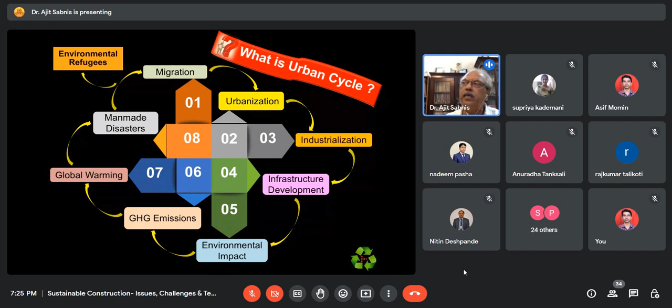Whereas environmental refugees are those people who, out of natural calamities, let us say in a rural area hit by floods, have lost everything. These are the people who just look for a safer place. When they come and settle on the outskirts of tier 2 cities, tier 3 cities, they are not really looking for a better lifestyle, they are just looking for a safer place. These are called environmental refugees. So this urban cycle is inevitable, and it keeps on growing.

Now, what are the major challenges due to climate change in the future? When we say future, this is actually what is already happening. By virtue of this climate change, we are seeing two extremes: either it is too hot or too cold or too windy or too rainy. Peak electricity demand will increase due to warmer and more frequent hot days, and the maximum capacity of current transmission systems will come into the picture. Extreme and unpredictable weather conditions will come into the picture.

Potential water shortages will happen, and this will also lead to uncertainty over our hydroelectric plants working and their efficiency, uncertainty over the water supplies for cooling power plants, etc. And then the danger of natural calamities, including floods. We all know the recent flood in Pakistan, in which so many people were killed, and the earthquake in Turkey, where more than 50,000 people have died.

So these are all due to extreme major changes that are happening, and these are the effects which we are already seeing. They are not future. That's why I would like to say the future is now. It is not the future which we are going to face 50 years later, but the future is now.

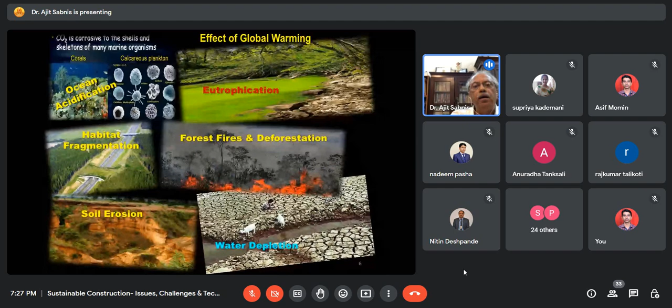These, and then there are several adverse impacts which are taking place. Now, let us come to the real definition of sustainability versus sustainable development. How do we actually define sustainability? Sustainability is that in which the components of ecosystem and their functions are maintained for the present and then future generations. So this is as per the National Building Code 2016, Part 11.

Now, whereas sustainable development as per the World Commission is that which meets the needs of the current generations without compromising the ability of the future generations to meet their own needs. So these are the important definitions, what actually is development, sustainable development and sustainability. So sustainable development calls for strategic approaches as engineers, and it is the individual duty of every individual to participate in saving our planet.

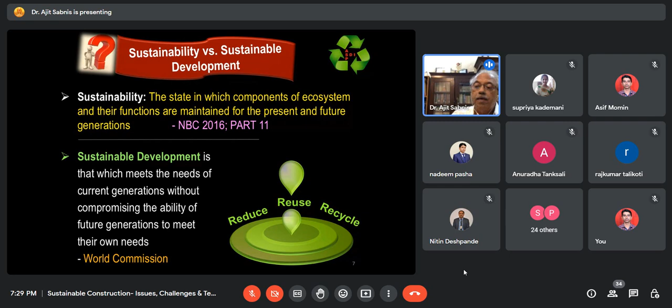Now, what is sustainable construction? As of now, there are several definitions to explain what exactly is sustainable construction. I have just picked up these two important definitions which are more accepted. One definition is sustainable construction is the creation and responsible management of healthy built environment based on resource efficiency and ecological principles. The other definition says a holistic process aiming to restore and maintain harmony between the natural and built environments and create settlements that affirm human dignity and encourage economic activity.

So essentially, both these definitions can be put together, and then we can actually draw the meaning of sustainable construction. Sustainable construction itself is a very vast subject, and before we actually start dwelling into it, sustainable construction cannot be just one of the verticals which we can separate out from the other verticals of a society. Sustainable development has to be firmly founded upon three fundamental pillars: socio-cultural, economic, and environmental. They are not just different verticals, but they are actually completely interconnected.

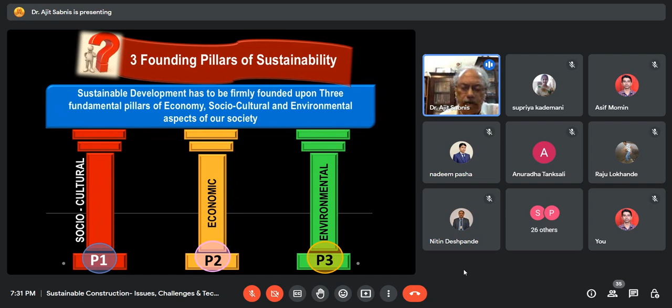So whenever a building is constructed, whenever an infrastructure project is developed, it doesn't just stand there as a separate entity, but it will have its own impact on the surrounding environment. The inhabitants in the surrounding areas, people living there, will get affected. The economic process will get affected. So that is why these founding pillars of sustainability are completely integrated, and there is absolute necessity to take all these things into consideration.

Now, why are we talking more about the construction industry, in particular infrastructure, industrial, and domestic buildings? If you take the total global energy consumption scenario, or nation-wise, let us say in India, if you leave out the agricultural and other areas and just add up domestic, commercial, industrial infrastructure, real estate and mixed use, that almost forms about 73% of the entire Indian energy consumption.

So natural resources are directly proportional. The natural resources we use to produce this kind of energy is amazing, actually. By 2050, they say that we will consume about 3 times. In about 100 years, we will be requiring one more planet Earth to survive. So that is why so much emphasis is being given. Now, let me talk about SDGs, Sustainable Development Goals.

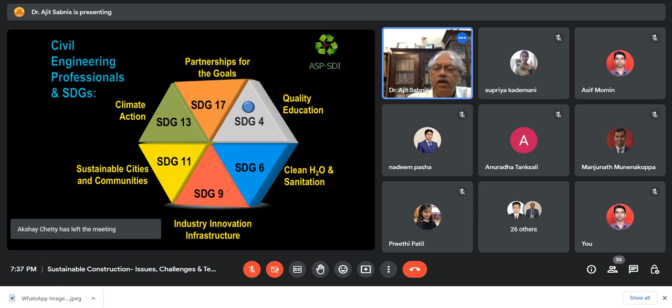Now, in what way are buildings important? Buildings interact with the environment in various ways. Throughout their life cycle, they consume resources in the form of energy, water, materials, etc., and emit several greenhouse gases. We say only carbon dioxide is the greenhouse gas, but actually there are 6 other important greenhouse gases, all converted into carbon dioxide equivalent. That's why we call carbon dioxide one of the important greenhouse gases, but in general we call it carbon footprint. So when we talk about carbon footprint, it is not carbon alone, it implies carbon dioxide.

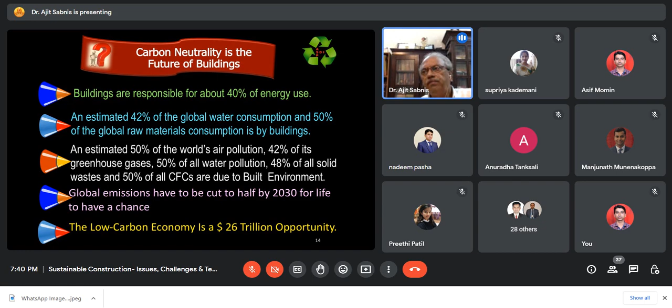Now you will wonder, actually China, USA, and other European countries all put together emit almost 61% of the global greenhouse gas emissions. India's contribution is only 7%, but we need not be happy about that. Our contribution is 7%, but it is getting multiplied because of the population, and very soon we will overtake everybody, unfortunately.

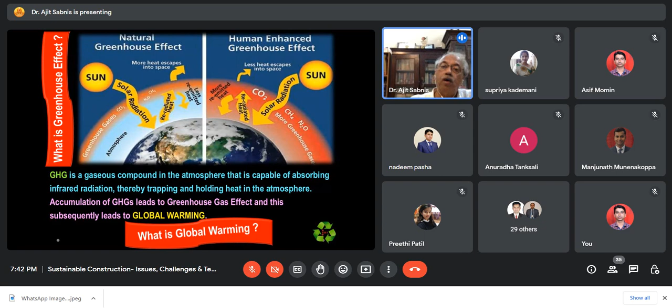This slide is important. On the top, what you see are the important greenhouse gases, about 6 of them: carbon dioxide, methane, nitrous oxide, etc. For example, carbon dioxide and hexafluorides - hexafluoride, if you take a global warming potential of about 100 years, is almost 23,900 times worse than carbon dioxide. But even then, we take carbon dioxide as one of the primary greenhouse gas emissions, because carbon dioxide lives in the atmosphere for almost 140 years.

Now let us say, hypothetically, today or tomorrow all the world stops the carbon emission of greenhouse gases. It will take almost 115 to 140 years to effectively get a carbon dioxide free, greenhouse gas emission free atmosphere. This period is called the lock-in period.

So you don't be happy - that means we need to work continuously for 140 years on greenhouse gas emissions. You can imagine the amount involved. That is the reason why all the other greenhouse gases, other than carbon dioxide, which have a very short-lived life in the atmosphere, are converted to an equivalent of carbon dioxide. That is why the unit of carbon dioxide is in terms of kg CO2 equivalent - in brackets they write 'E' per kg. So everything is converted into an equivalent.

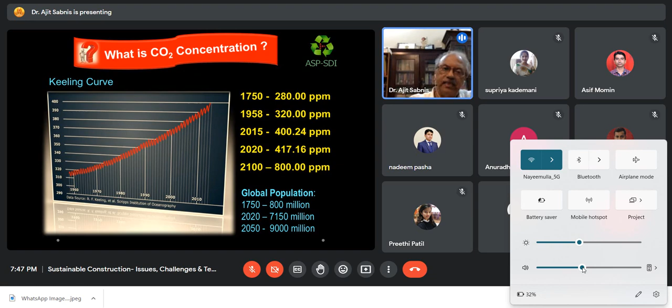If you start, the concentration increases to 550. Some people say the human species will start bleeding through their nose. That's the reason why air pollution also becomes extremely detrimental.

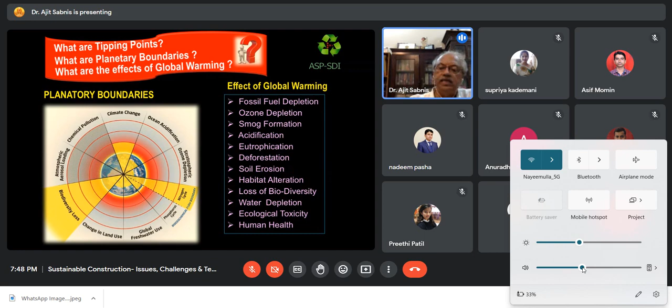Now, urban heat island - I'm sure we all know this. The more we cover, the more hard surfaces we create, reflective roofs, heat from vehicle tops, vehicle surfaces - you name anything, there is some reflection, some absorption. This happens more in cities, particularly in gated communities, and this phenomenon causes island effects.

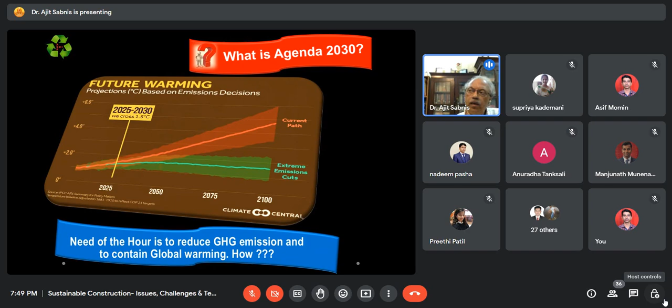Frequently in the sustainability domain, you hear of what is called Agenda 2030. This is nothing but an agenda stating that by 2030, every country should reduce its emission of greenhouse gases, and thereby help reduce the warming of the global temperature to less than 1.5 degrees. That itself is the big agenda.

Now I'd like to come back to the national Indian carbon footprint construction industry scenario. As I said earlier, India's total contribution to global emissions is about 6.5 to 7%. Within this 7%, the construction industry contributes about 40% of the total emission. And within that 40%, 75 to 80% is from operation and maintenance, while the pre-construction and construction phases account for 20 to 25%.

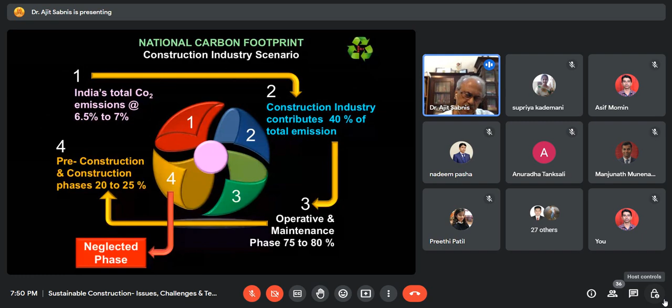This 20 to 25% pre-construction phase is completely neglected by civil engineers. We think sustainability comes into the picture only at the construction phase, but no - it is actually in both the construction and pre-construction phases that it all comes into play. That is why we have several green rating systems and other things that come into the picture. Now, what are the different types of construction?

We have the linear construction method - the conventional construction we are used to: take, make, use, and then dispose. We are not really bothered about wastage - how many times we use the formwork, how many times we use materials, whether we recycle or reuse material. We are really not bothered. Even today, in general, the majority of construction follows this linear method, which is actually a big no.

Then there is circular construction, also called the cradle to cradle principle, where products and assets are designed and built to be more durable, and to be repaired, refurbished, reused, and then dismantled. For example, you construct a building using certain materials with specific specifications and qualities, and after demolition of that building, you should be able to reuse and recycle those materials into a new building.

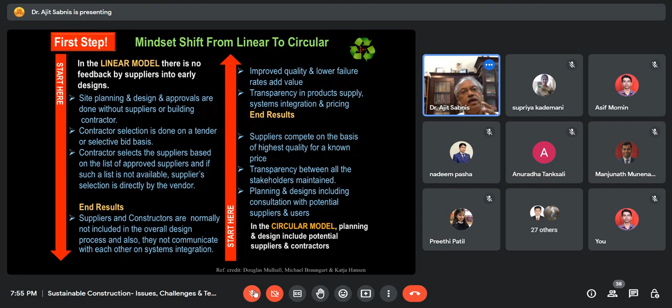So, taking all those inputs, the project takes shape. The design of the project actually takes place. So that means the project design itself becomes more inclusive, more transparent. So as designers, as academicians, we need to shift our mindset from linear construction methodology, even the linear design aspect, to circular design and then circular construction.

Now, there is also a framework to illustrate the application of the circular economy, and it is known as ReSOLVE. It's an acronym, where the first step is regenerate, and the second step is share. The third step is to optimize everything that comes into the picture. Then loop, where remanufacture and the 3Rs come into the picture. Virtualize: dematerializing and going virtual. Then exchange: replacement of old and inefficient materials, applying new technologies, choosing sustainable new products, and all these things actually come into the picture.

So this is one of the new platforms which is under production, and I will not get into the details of this ReSOLVE, but just as information, I would kindly ask you to please remember it, and you can go into the details subsequently.

Now, I told you a little while ago about the carbon spike, and that the pre-construction and construction area is completely neglected. If you take the entire life cycle of a building, the design life will probably be about 50 to 60 years or 60 to 70 years. But for a building constructed well, we don't even think of demolishing it. As long as it lasts, it lasts. But let us take the design life as 60 to 70 years. And in that 60 to 70 years of design life, the construction period is hardly a maximum of 2 or 3 years, not more than that, right?

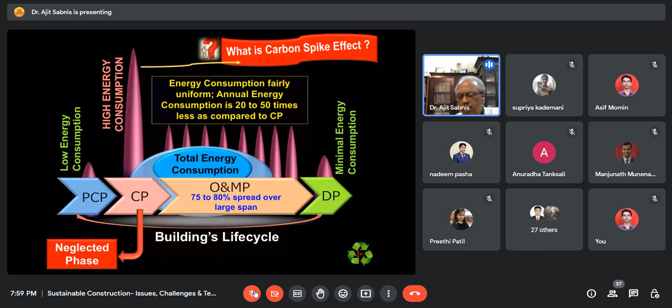Now, what exactly is a comprehensive contemporary ecological design, or as some people call it, comprehensive ecological design? Now, this calls for actually a significant level of knowledge and experience with selecting approach.

Now, for civil engineers, this is going to open up a huge field; this has already opened up. So if there are any students or postgraduates who are listening to this, or faculty members, please remember that this is one field which I have seen with my own eyes across the globe that is going to be one of the extreme. So please consider doing your specialization, post graduation, doctorate in these fields where the demand is going to be extremely huge. Even as a private entrepreneur, these fields are going to be the eye catchers very shortly.

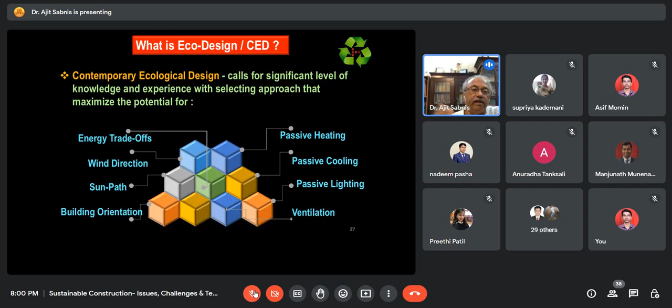So energy trade-offs, wind direction has to be taken into consideration, sun path has to be taken into consideration, the passive architecture, building orientation, passive heating, passive cooling, passive lighting, ventilation, all these things have to be taken into consideration if your building has to be very comprehensively designed.

If you take the elements of sustainable construction design parameters as per NBC 2016, these are actually the 10 elements of sustainable construction. Now, inclusive approach, not in parts. This is what that means. It is not linear construction as we discussed. It has to be a circular construction. The use of technology and advancement has to be incorporated into the entire design so as to minimize or optimize every resource that is available. Manpower resource, the material, all resources have to be minimized.

Buildings as material banks, which we already discussed. Minimum natural resource consumption, that means unnecessary factor of safety need not be there. Thumb rules should be very optimized. We can't now afford that kind of a liberal utilization.

For example, I keep saying there is no point in importing marble from Rajasthan and using it in a South Indian house rather than using granite. Or, for example, in Gulbarga and those areas, not using the locally available Shabad, Kadapa, and all those beautiful slate materials, but bringing all the marble all the way from Rajasthan and then using it. This exactly is the minimum natural resource consumption. You minimize, you utilize the locally available material.

Now, once we have studied these 10 elements in the last slide, let us go into what exactly the construction parameters are, and in the life cycle analysis, which one do we adopt? What exactly is life cycle analysis? We studied it. We take the entire life cycle of a building, starting from whatever materials it requires. I think I will read this here, it will be better.

Life cycle analysis is a method of assessing the sustainability levels of buildings or infrastructure projects from pre-construction phase to demolition phase, satisfying the circular construction principles or the cradle to grave, cradle to cradle principles.

Then now we have three methods of life cycle analysis. One is the process analysis, which actually involves the data related to each of the processes, starting from raw materials extraction, and non-availability of reliable data. Now here, the full data for the entire thing is not available to us. It's extremely difficult. Who will keep the idea how much raw material was used for preparing the tile that is used in my house? That data will not be available. It's an extremely complicated process.

Then the second one is input-output analysis. This particular methodology captures and derives data from several resources, including the data from the economic sectors. Hence, this also becomes extremely complicated because the data will keep on changing; it is extremely dynamic. The economic conditions are so. This also has its own limitations.

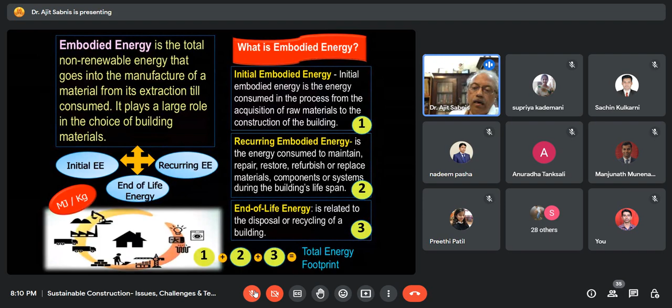So in combination, initial embodied energy, recurring embodied energy, and end of life energy is the total energy input footprint of the life cycle of a building. So embodied energy is not just one simple value. As engineers, we have to take all three classifications, three types of energy, into consideration.

Now, what is embodied carbon? Embodied carbon is the carbon footprint of a material. It considers how many greenhouse gases are released throughout the supply chain. The way energy consumption is calculated in embodied energy, similarly, how much carbon dioxide is emitted in each process gives an idea of embodied carbon. Embodied carbon, as I told you, is expressed in kg carbon dioxide per kg, and embodied energy is expressed in megajoules per kg, per cubic meter or per unit; everything can ultimately be converted.

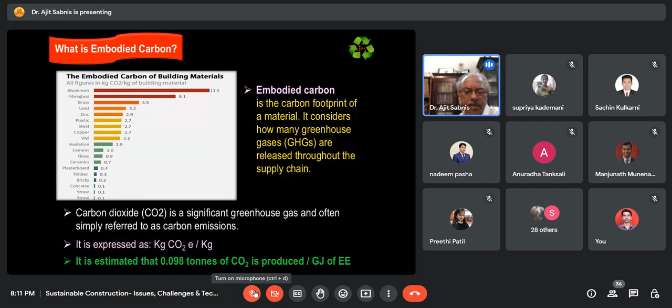Now, once we understand embodied energy and embodied carbon, there is a beautiful concept. We can use only this embodied energy and embodied carbon to understand the status of a building.

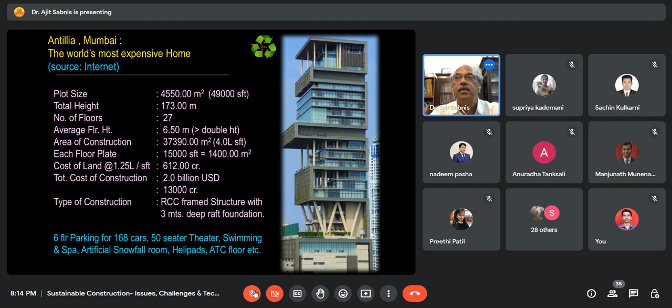Please believe it. The total cost of the project is 13,000 crores, which amounts to about 3 lakh per square feet. The house has got 6 car parking floors for 168 cars, a 50-seater theater, swimming pool, spa, artificial snowfall room, helipad, an air traffic control floor, etc. Now, how does it calculate from the embodied energy and embodied carbon content? The cost of construction is approximately 2.86 lakh, or 3 lakh, per square feet.

Now, what is the total embodied energy of the entire building? I will tell you how to calculate embodied energy in just a few slides, but as I said, we need megajoules per kg or per unit. This house is expressed in gigajoules, that is megajoules multiplied by 10 to the power of 3. So 3,36,510 gigajoules is the energy consumed for the entire building. When you convert that into electricity at 10 rupees per unit, the energy consumed by this building is approximately 92 crores. That is, 100 crores is the embodied energy in terms of commercial value of this building.

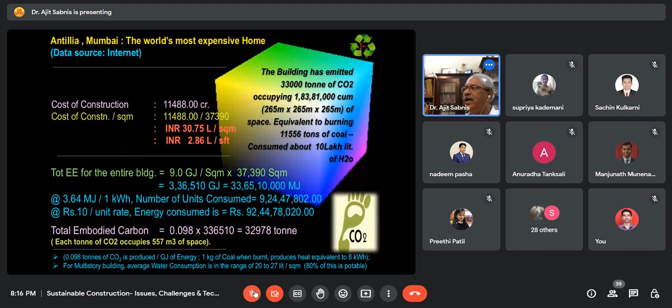Now, just 1 second. This is how we calculate; as an example, you can take any building and calculate using the embodied energy and embodied carbon. Then what are the other ways to calculate embodied energy and compare whether my building is sustainable or not? We need to understand that there are buildings in India, for us to compare, which are extremely sustainable. They are multi-storied, framed structures, but in spite of that, they are extremely sustainable.

Benchmarking is one of the important aspects specified by the UNDP, the United Nations Development Program, and also UNEP, the United Nations Environment Program. Benchmarking of buildings provides a set of measurable baseline values which facilitate improvements in the overall energy performance of a particular building.

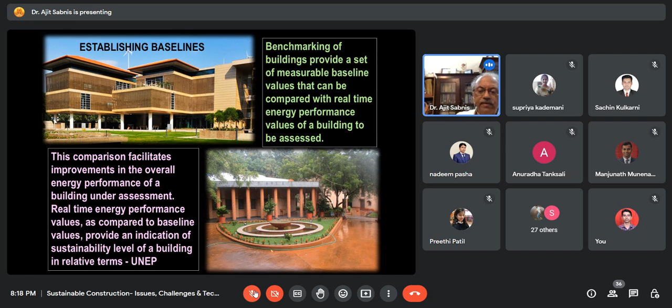See, in this figure, we see two figures. They're simple buildings, but actually extremely elegant. The bottom one, you see an extremely elegant standalone conference hall. And this is one of the buildings what we see. So we need to understand the baseline buildings also.

And there are what are known as the green building ratings that also come into the picture. And please remember that all these green building ratings are criteria-based ratings. That means if we do rainwater harvesting in a project, we get so many marks. We use sustainable materials, we get so many marks. So these are all criteria based.

No doubt, by following green rating systems, it could be anything. It could be IGBC, it could be USGBC or anything. There are several green building rating systems. In the world, approximately there are about 64 green rating systems. And in India, we have several rating systems being used.

HK BEAM, which is from Hong Kong. UK BREEAM is also being used. Singapore Green Mark is being used in India for green buildings. But IGBC, GRIHA rating from TERI, IGBC and USGBC, these are very well accepted green rating systems.

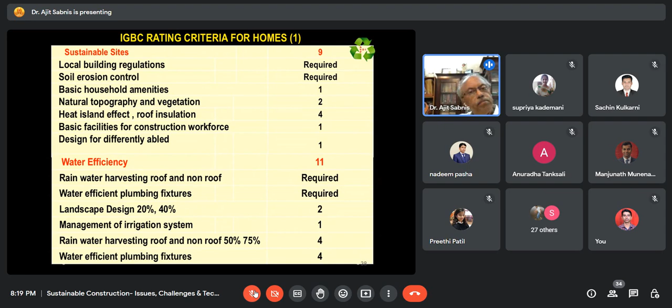Now, these are just the criteria. If you go through the green building rating systems, these I have just taken to give you an idea. In terms of the Indian Green Building Council, how do they actually rate a building? These are the different criteria, which you can get on the net if you just search IGBC rating criteria. So I will not go through these in detail due to paucity of time.

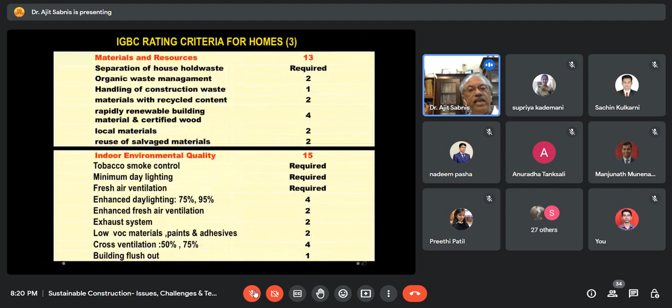Now, so when you get these LEED rating systems, let us say your benchmark project. Just a few minutes back, I talked about establishing a benchmark project. So now that benchmark project has to be validated by the several green building certifications. So the example I'm going to discuss with you in a few more slides has been validated with reference to the LEED certification and also IGBC certification. So BMP is a benchmark project, DMP is a demonstrative project. So this benchmark validation is also actually done.

Similarly, we can take green low energy buildings, etc. Somebody was asking me how much it should be, is there any criteria for how much it should be, etc. See, there is no fixed criteria, but there are classifications which I'm going to now discuss. Actually, the next 30 minutes is going to be extremely technical and extremely fast. So we will understand all the things.

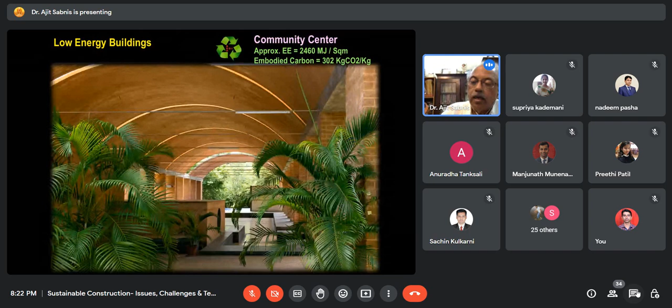These are a few. For example, for this particular building, the embodied energy is only 2,460. As compared to this particular configuration of a building, suppose you construct the same building using an RCC structure, it goes to 5,000 to 7,000 megajoules per square meter. And embodied carbon also goes to 500 to 600 kg CO2 per kg. So there is no specific range which has evolved, but there is a classification available to us. These are a few examples of low energy buildings.

Now, I will quickly rush through 12 important steps required for sustainable construction. How can we design sustainable construction? Step number 1, we need to preliminarily peg the details of the performance targets. That means what should be my energy consumption, what should be my water consumption, what type of material I should use, what will be the economic performance, what are the different construction practices, what do I do with the waste, how do I optimize the waste, and how do I give the best indoor environment quality, landscape. All these things will have to come into the picture, and the targets, and then the pre-construction phase design has to be done.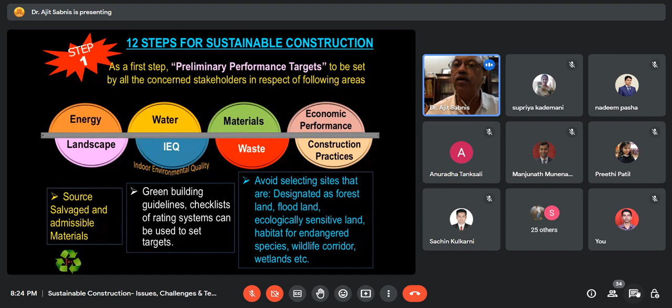This is where the circular principle comes into the picture, because all these things require vendors' inputs also. Just the owner or the architect or the primary designer will not be in a position to give inputs for all these things. That's why the circularity principle calls for extremely transparent involvement of all the engineers and all the stakeholders.

The second step is to protect or enhance the site's ecological integrity and biodiversity. Basically, you try to minimize the development footprint. Suppose we don't construct from compound wall to compound wall and claim we've achieved maximum coverage, or deviate using dirty schemes like akrama sakrama. Reduce the footprint.

I happened to be with Abdul Kalam ji, and had the opportunity to spend about 4 hours one-to-one with him. I asked him how he would define sustainability in his own terms. He gave me a fantastic definition: sustainability is a thin line drawn between need and greed. That answers the whole thing. Out of greed, if my requirement is a 1000 square foot building, I construct a 4000 square foot building. So this is the line to be drawn between need and greed.

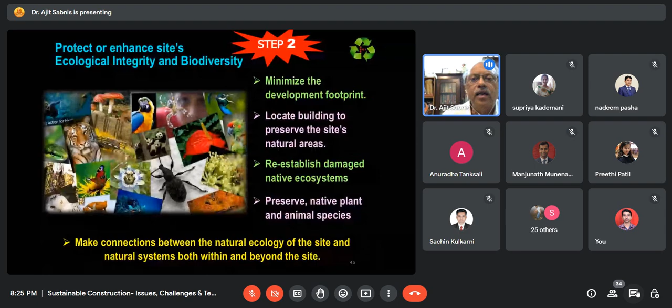This also applies to various other site conditions. The third step is to reduce or eliminate disturbance to the water system. This isn't just about small 30x40 or 40x60 sites — we're talking about huge infrastructure projects where land acquisition takes place. For example, we see what happens in Bangalore, where lakes get occupied. This is an important criterion: we should not disturb the existing water system, as nature has almost found its own way for stormwater runoff and other things.

Minimal disturbance has to be caused. Not only this, we need to address the entire water system — separators for oil and water separation should be done, and roads and parking areas should be designed without curbs, so that stormwater runoff from roads can be collected on site. In a nutshell, we need to reduce or eliminate disturbance to the water system.

Step number 4: prevent or reduce potable water use for irrigation. We need to start using recycled water, reused water, and water-efficient plants to the maximum extent possible. It's not just about water utilization itself — rainwater harvesting comes into the picture, along with water-efficient plants. This is where science, innovation and technology come in, where native species can be used. Use water-efficient irrigation systems, micro irrigation, moisture sensors, etc. All these things have to be brought into the picture.

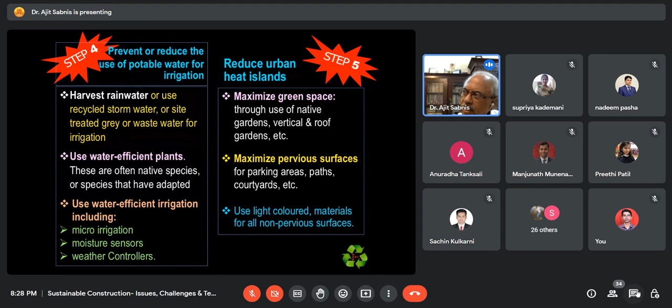Step number 5: reduce urban heat islands. Maximize green spaces, and don't cover unnecessary area around the building — keep it as open as possible, with maximum pervious surfaces. Use materials that are pervious — for example, new generation pervious concrete and blocks. We can use several materials that let hard surfaces percolate, increasing the surface area of water-absorbing, pervious surfaces, so the heat island effect can be reduced.

Step number 6: use existing and proposed trees. For plantings, if there are grown-up trees, try to replant and transplant them. Orient the buildings to optimize — this is where we're talking about passive architecture. Orient the building to wind, taking the sun path and wind path into consideration, and use the existing topography as well.

Step number 7: design for flexibility. There's a cardinal principle in architecture — form follows function, function follows form. We need to design structures to be more resilient and flexible, allowing for changes in use forever. I may design a building today as a theater, or build a structure as a Kalyana Mandapam or marriage hall. In Bangalore, we've seen many such buildings converted into theaters, or theaters converted into marriage halls. Instead of demolishing and rebuilding, the design should take flexibility into consideration.

Also, design for disassembly, which I already talked about — we need to select materials that can be disassembled and then reused frequently.

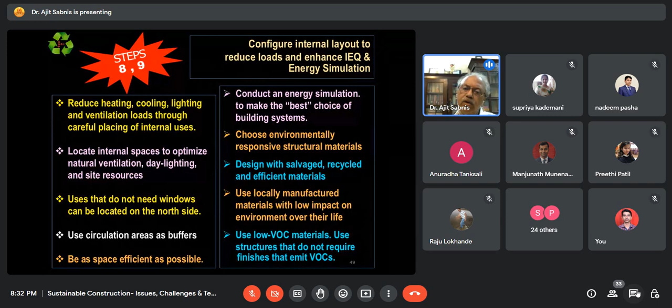And good thing is that a lot of awareness is happening, and many of the clients are coming out with these requirements. More and more green awareness is happening, and we need to use, as far as paint is concerned, low VOC materials, use structures that do not require finishes that emit VOCs, etc.

Then step number 10, design the envelope. That's exactly what I talked about, designing the envelope to bring the daylight and views. So designing the envelope means the entire outside wall, outside portion of the building, the barrier between the external environment and the internal environment, is the envelope. As the definition goes.

Now, for example, this particular building you are seeing now is just a sample building done under the guidance of the United Nations, following the United Nations circularity principle. It's a two-storied building, ground and first floor, with vault construction on the roof. It doesn't have a flat roof, no air conditioning, no fans inside, but there is a difference of about 10 degrees temperature inside and outside the building.

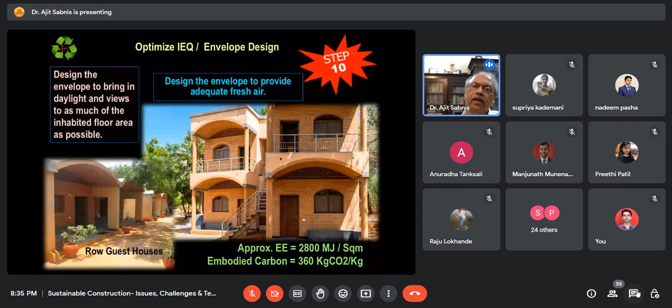Now, the designing of the envelope to bring the daylight and views to as much of the inhabited floor area as possible. So designing of the envelope becomes extremely important also.

Now, building envelope is the one which I talked about, which includes the solar aspect, the roof, the foundation, the walls, everything, and the interaction of the external environment into the internal environment should be studied. What exactly is the difference? What are the barriers? What is the function of the barrier? Is it only to avoid heat transmission, or is the external environment extremely moist, and is it to trap the moisture? These are the important considerations.

So we need to design the walls, the roof, the fenestration - that is the openings, the doors and windows, the joineries, the floor, the surface finishes. All these things have to be taken into consideration when we talk about the building.

Now step number 10, we already talked about good indoor air quality. Air quality encompasses factors such as maintenance of acceptable temperature, good indoor air quality, plus the indoor environmental quality also have to be taken into consideration. That is acceptable temperature, relative humidity, control of airborne contaminants, and because of that it's advisable to use low VOC materials, and adequate ventilation, etc. All these things come into the picture.

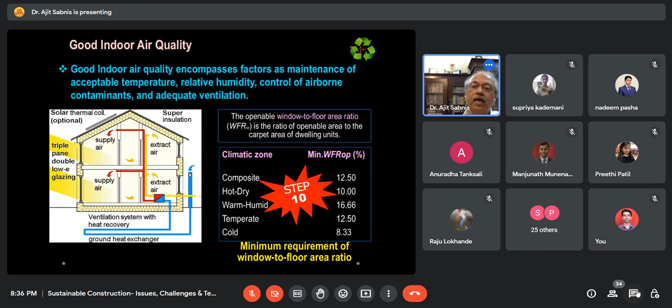Now step number 11 is the accumulation, as I said - first reduce the ozone depletion. That means reduce the usage of air conditioners and optimize the entire HVAC system itself.

Eventually, then installing alternative wastewater technologies. How can we reuse the water? What kind of treatment plants can be used? How can rainwater be used? All these things can be done - rainwater harvesting, how can we replenish the water?

All major building system designs should be documented for commissioning, taking these things into consideration. So that is why in the circularity principle, more than the construction phase, all these things which happen in the pre-construction phase and the construction phase become the most important thing to view.

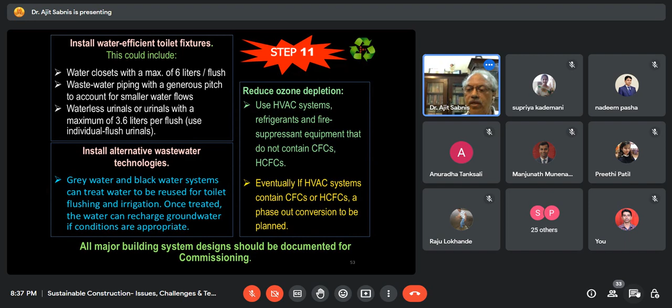Now step number 12 - what exactly are the alternative building materials? Which material should I use? This is the question which always comes into the picture. I will not go into detail on materials - there are several materials, but most of us know what the materials are.

Just to give an example, between concrete hollow block and concrete solid block, which is better? Which concrete block in terms of embodied energy and embodied carbon? That should be compared with tables. There are a lot of tables available which give you the values of embodied energy, embodied carbon, etc. So from those two perspectives, choose those materials.

And then low embodied energy materials should be chosen and maximized. So for example, instead of concrete blocks or hollow blocks or even clay bricks - bricks, if heated, become much less sustainable. Bricks are not sustainable.

Only soil compressed blocks which are not heated by burning coal are sustainable, manufactured at site. They are sustainable, not the bricks.

The other part is, suppose you use fly ash bricks - they're definitely more sustainable. So instead of fly ash bricks, if you want to use something in between, then aerated concrete blocks come into the picture, which meet all the compressive strength criteria, the durability criteria, and the volume requirements.

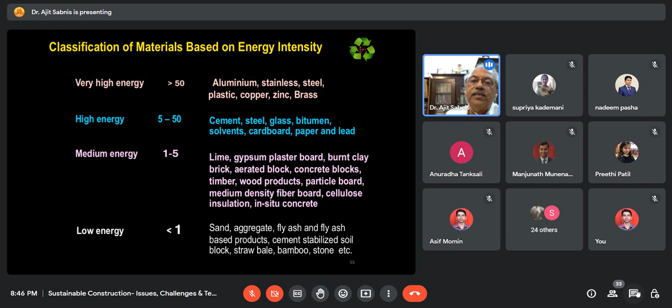Now, I have another 30 minutes, so we will come to very interesting case studies. I told you that there are a lot of tables where we get these values. This is out of academic interest.

What you are seeing on the screen is an embodied energy and embodied carbon table called Inventory of Carbon and Energy, published by Bath University, a joint venture with the Institution of Civil Engineers, UK. Every year they take the entire global scenario into consideration, and average values of different materials are used. For example, I have taken aggregate: it has embodied energy of 0.1 megajoules per kg and embodied carbon of 0.005.

Whereas for aluminium, they give you complete details for different types. If new aluminium extrusion is used for windows, it comes to 218. Kindly focus on my cursor if it is visible to you. Under embodied energy, for virgin aluminium it is 218, the highest embodied energy among the materials.

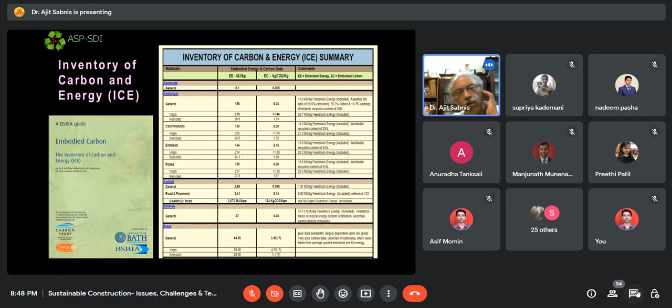You can actually download this. This is a free download available. You just type download PDF inventory of carbon and energy. You will get these values. This is extremely beautiful. So these are the tables. And not only that, for every material, they give actually material profile. They give different data, different characters, and what exactly is its impact. Everything, and what is the standard deviation also they give you.

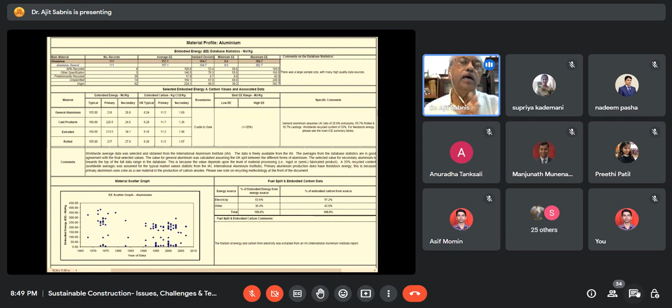So, for example, cradle to gate boundaries, if you want to analyze the building from cradle to cradle, or what we spoke about circularity principle, the standard deviation is about plus or minus 20%. So all these details, it's very difficult to explain; this one particular page itself we can talk about for hours together. So kindly go through these, download that document, and you will be able to see all these details. It's not a very big document, 50 to 60 pages.

Now, as academicians, you would be interested, how do we calculate embodied energy? So I have taken M200 concrete. How do we calculate? We all are used to rate analysis. We know the density of materials, we know all the physical and mechanical properties of the materials. So based on that we can calculate. Now let us take M200 concrete per cubic meter. Approximately I have considered 400 kg of cement is required per cubic meter of M200.

Now, as per the inventories we saw, from the table, you see that for OPC it is about 4.5 megajoules per kg of cement. So for 400 kgs, you get 1800 megajoules per cubic meter. And similarly, for coarse aggregate, you get 166.5 megajoules. And then for fine aggregates, you get 129. Transportation is also involved in the cement, so they add for the cement transportation. This also is a figure given in the inventory table. That is why I have added this.

If you add that with properly calculated units, the unit of transportation is 0.00285 megajoules per kg per kilometer. So you need to be very careful in calculating the units. Then you add about 10% for miscellaneous activities. So the total embodied energy per cubic meter of M200 concrete is 2493.70 megajoules. If you divide it by the density of the concrete, I have taken 2400 kgs per cubic meter here. So if you divide the total of 2493 megajoules by 2400, you get 1.06 megajoules per kg.

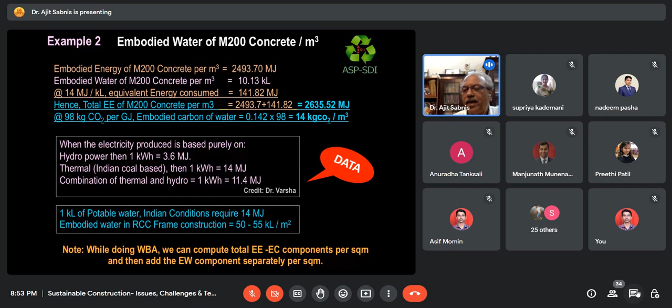Now, similarly, we can calculate on the basis of embodied water. I will just rush through this. We just took the example of materials, how we calculate for the material. Now, a building doesn't consider only the materials. Let us say, how do we calculate for the formwork? Let us take a shuttering formwork of about 5 meters by 5 meters. You have different formwork plates of different sizes, 900 by 600 mm.

All of us are used to this conventional formwork system. Now, there are conventional formwork systems which use MS floor plates, jacks, adjustable jacks, then steel props, etc. And then there is also a formwork system which completely uses plywood. You know, the entire floor is also done with ply, and all those things.

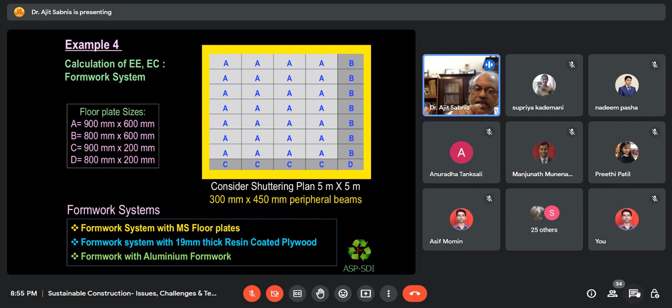Then there is an aluminium formwork system, which we call a monolithic formwork system, which we see in the majority of multi-storied buildings or mass housing, etc. These are the three systems which we consider. And if we analyze these three systems from embodied energy calculations and embodied carbon calculations, we can actually calculate all these. I will just show you this example.

Now, for example, by embodied energy calculation, if you take the conventional formwork system, what does it include? It includes MS floor plates, MS spans, jacks and props, silver oak for the supporting. We don't use it for everything. So this is the combination of the conventional formwork system when we use it. So we need to calculate how many numbers of them, what will be the total quantity, the unit weight, the total weight in kgs, and from the tables, from the inventories, what will be their megajoules embodied energy per kg and the total embodied energy.

So for the conventional formwork system of 5 by 5 meters, the total embodied energy is coming to 80,334 megajoules per total 25 square meters. So per square meter, if you actually calculate, it comes to about 3,213 megajoules per square meter. Similarly, embodied carbon values are also put in, and they can also be calculated. Thus, we can actually calculate the embodied energy for the conventional building, and then decide.

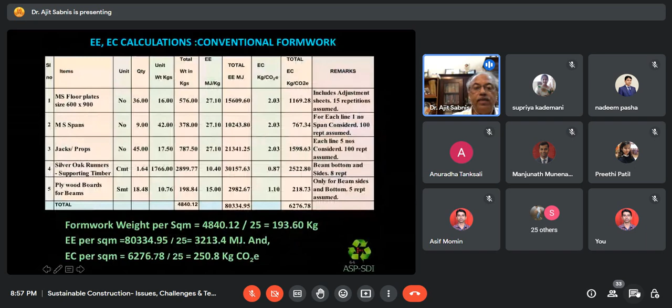Once I have this, then let us say we work out the plywood formwork also. Essentially, MS floor plates in the formwork will be replaced by plywood, and what will be the plywood total embodied energy? You saw the embodied energy per square meter of conventional formwork was 3,213, as against now here the plywood formwork is reduced to 2,822. Why is it reduced? Because with the same formwork the number of repetitions are more, the wood has less embodied energy, and the finish is much better.

Now, the aluminium formwork, if you take it, there are many names used, aluminium formwork or monolithic formwork. What we see, the entire floor is cast together. You would have seen in mass housing, each floor is cast at a time, where all the walls and other things, everything is concrete. That kind of a formwork is used there.

Then you will find it suddenly reduced to 1,700 megajoules per square meter. This is mainly because of the extremely good finishes and huge amount of repetition. This almost takes about 150 to 200 repetitions. So the very repetition will reduce the embodied energy. And added to this, these are all aluminium formwork. Once you have reached 150 to 200 repetitions, even if you want to throw it as waste, 85% of it is still retrievable and recyclable.

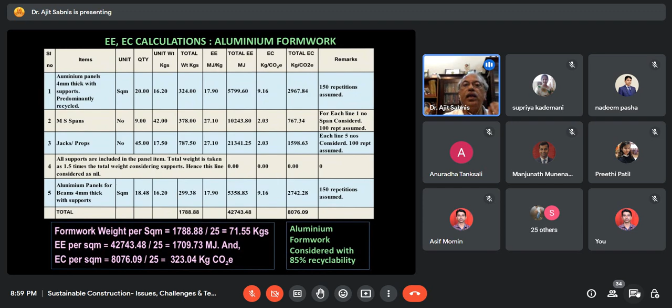But does it work, is the next question. That is why I said it is always the discretion of the engineer which one to use. If I have only one or two buildings or only one infrastructure project, those repetitions may not be used, so then aluminium formwork doesn't become viable. So I can go in for the next possible option. So this is how sustainable formwork can be done.

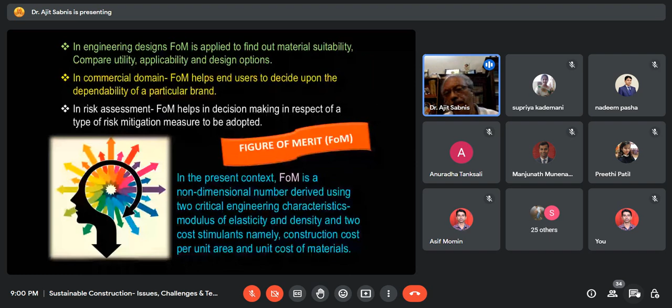There is another method, called figure of merit, which is slightly more complicated. It takes into consideration modulus of elasticity, material density, cost of construction, cost of material. Now we saw the embodied energy. How do we calculate from the embodied energy perspective? How do we calculate from the embodied carbon perspective?

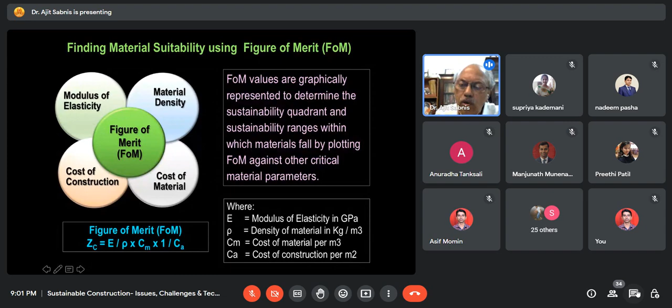And now this is how we calculate the figure of merit. Figure of merit is a slightly complicated thing; let us have some other exclusive session on that. But please know that this is the formula which is used for calculating the figure of merit. And using the figure of merit, we can actually identify and classify the materials.

For example, from the figure of merit perspective, we can actually draw the materials in which range they will fall, whether in the low range, the high range, or where exactly they fall. So with figure of merit and metals in construction, from the embodied energy perspective and also from the embodied carbon perspective, we can classify the materials using the figure of merit.

Due to paucity of time, I will not be able to explain in detail. So ultimately, with the quadrant based on the figure of merit, we can classify all the materials that go into consideration. For example, from the embodied energy and figure of merit perspective, cement mortar, clay brick, granite, glass, marble, sandstone all fall in the most suited materials from the sustainability point of view.

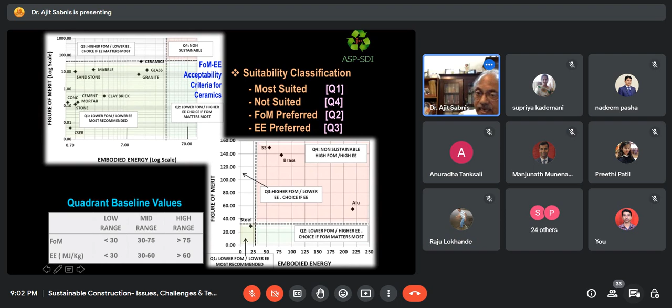Then some materials fall in quadrant 2. Quadrant 4 is not sustainable at all; for example, brass falls in the non-sustainable materials, so it is better not to use brass in the building structure at all. Stainless steel, not mild steel, is another material which falls in the non-sustainable range. So this is how we actually classify them.

There is one more complicated system of analysis called SDI, the Sustainability Development Index method. This is the most complicated of the algorithms and software available in the market. I'm happy to share that this is my contribution to the field of sustainability. The Sustainability Development Index takes into consideration about 28 ecological and engineering parameters, material properties, embodied energy, embodied carbon, feedstock energy, all those energies.

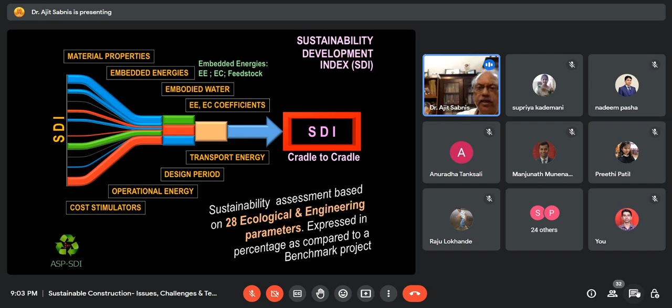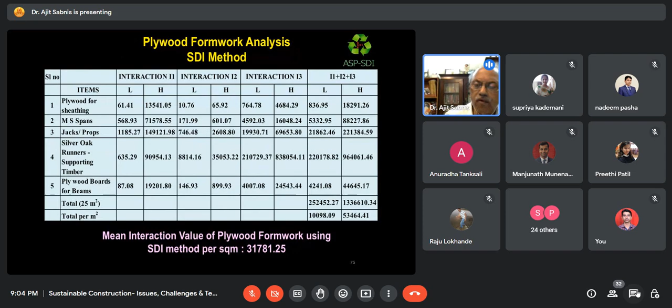And the benchmark projects, taking everything into consideration. This involves very complicated algorithms and mathematical formulas. For the same formwork, the way we calculated using embodied energy and embodied carbon, we can use the sustainability development method per square meter for conventional formwork, plywood formwork, and aluminium formwork. It gives you a unitless number, based on which you need to assess the parameter.

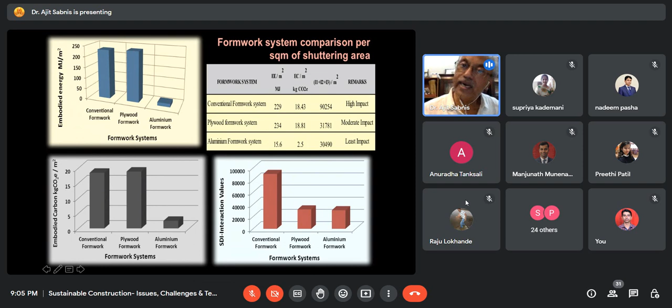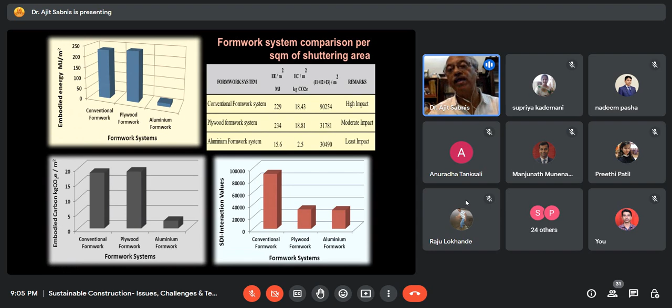In the sustainability development figure, 90,000 is for the conventional formwork, and aluminium formwork is 30,490. So all figures tell us that aluminium has the least impact. This way, for every system, we can use this for the material. This sustainability development index can be applied to several methods. Using this method, we need to establish the benchmark values, and once we assess them, we know what we need to achieve.

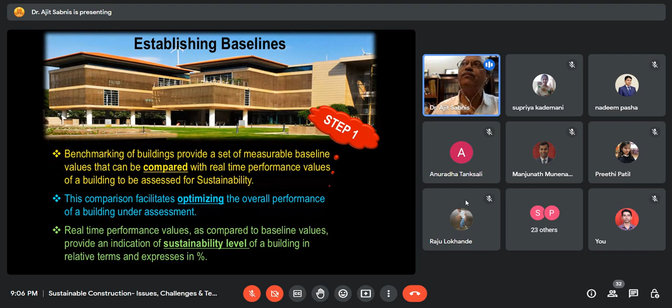So if you actually focus on reducing your total impact in concrete, reinforcement, and formwork, and also to a great extent on block work and block masonry, this particular triangle, and if we reduce these 4-5 important areas, all the things come into the picture. So this is taken as a benchmark project, and then the analysis was done.

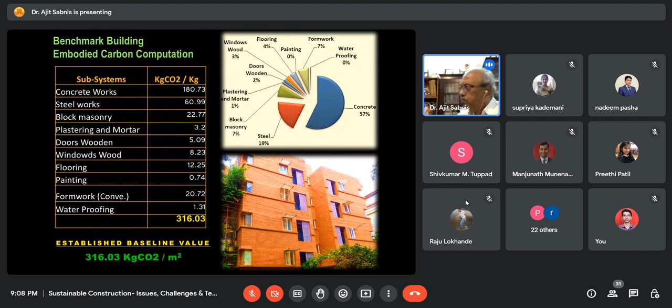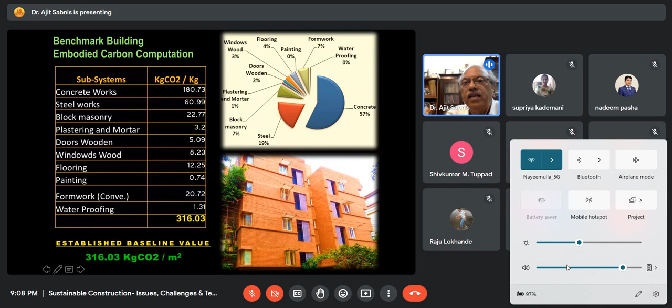The same analysis was done from the embodied energy perspective and from the embodied carbon perspective. From the embodied carbon perspective, 316 became the value of the benchmark building, and this is also the pie chart from the embodied carbon perspective. Also, concrete, steel, formwork, and block work become the major areas. Some of the graphs will show you very complicated computation tables, but let us not break our heads over this.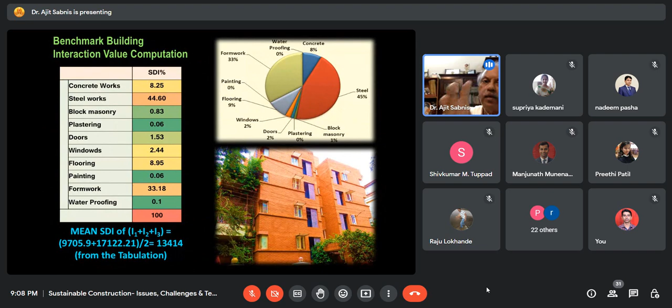But eventually, these are the benchmark values from the SDI, the third method. So once we have established these benchmark values, as I said, they have to be verified with the green rating systems, just to validate whether the benchmarking we have done is correct or not. As discussed earlier, the benchmarking project stands at the platinum rating. So our benchmarking project is good and can be compared as a project.

Now, this is the scenario in most conventional buildings. This is one of the most posh multi-storied apartment complexes in Bangalore. These are the salient features: residential building of 17 floors, RCC frame, 25,000 square meters. The envelope is solid concrete blocks. Flooring is vitrified tiles, granite, a combination of everything; joinery is wood, UPVC, plywood; formwork is conventional.

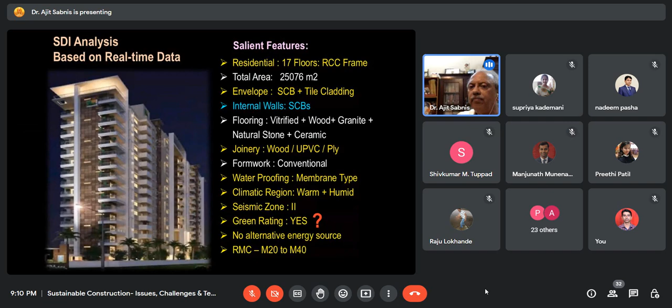Please understand that they have used conventional formwork here. Waterproofing is membrane type, for climatic reasons. So these are the standard specifications we see. This is based on real-time data. What is the real-time data? That means when the project is on the drawing board, we have calculated the bill of quantities based on the architectural design. Please remember that the project is not yet constructed at all. It is the pre-construction phase. That is why this becomes more and more important.

Now I calculate exactly the same way I discussed, according to the standard areas: the total reinforced concrete, plain concrete, vacuum dewatered floor concrete, reinforcement, etc. These are the important parameters in that building. These are taken from the bill of quantities, and the total area is known to us, so every individual parameter is reduced to total quantity per square meter, and then, using the density of materials, reduced to kgs, or some items are calculated per square meter or cubic meter, depending on the values we get in the inventory tables.

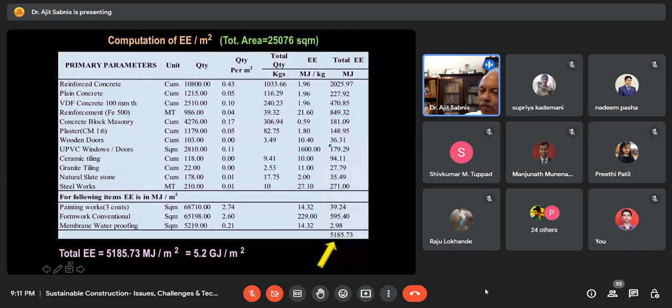So ultimately, as we have discussed from the tables, from the embodied energy perspective, 5185 megajoules per square meter is the value. Correct? Now, similarly, we can distribute it in the pie chart, taking all these things. So let us not worry about it.

Now, similarly, we can calculate the embodied carbon per square meter, and this building gives 483 kg CO2e per square meter. How much was our benchmark? It was 350. So from the embodied carbon perspective, I also know which component is contributing more to the carbon, and if we work on that part, I can make it move towards the benchmark project, that means try to bring this 483.75 to the 350 per square meter value.

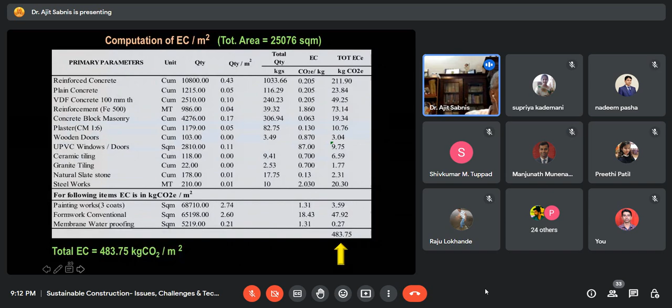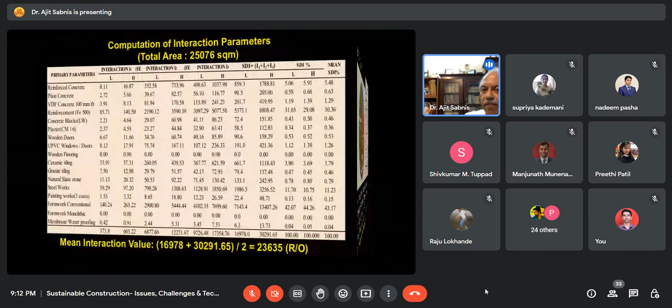So this is the same pie chart. And now this is the third method, from the Sustainability Development Index. We can also draw exactly the same pie chart and do the same analysis. And finally, we can compare all three projects as we did earlier.

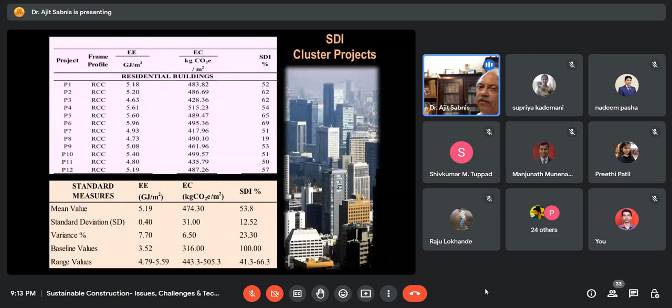Now, this can be done for a cluster of projects also. We need to go into details as far as the cluster of projects is concerned. We need to take the sustainability standard deviation into consideration, the variance, then the baseline values and range values. So for similar typologies of buildings, these things can also be applied. And once we apply that, it is possible for us to calculate and classify non-sustainable, least sustainable, moderately sustainable, and highly sustainable buildings. So we can travel from 0% to 100% sustainability models.

Once that is done, from the embodied energy perspective, and from all three perspectives, we can draw the mean line and standard deviation for the cluster of projects, and place these projects. For example, in the cluster of projects taken, a few of them fall in this range, meaning they are moderately sustainable.

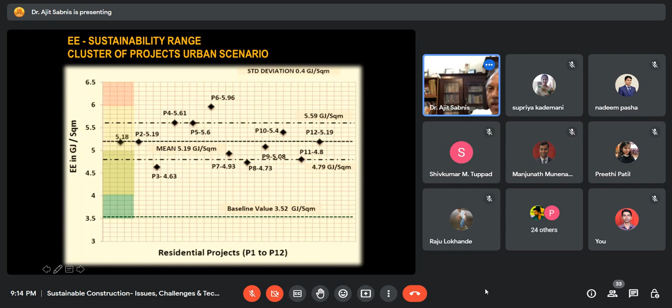Some projects, let's say project number six, fall at 5.96 gigajoules per square meter, which is 5,960 - this falls into the non-sustainable material category. So we can classify buildings using all these values and perspectives.

So in conclusion, sustainable assessment leads us to embodied energy, embodied carbon, material suitability, material classification, building classification, and building clusters - all of this can be done.

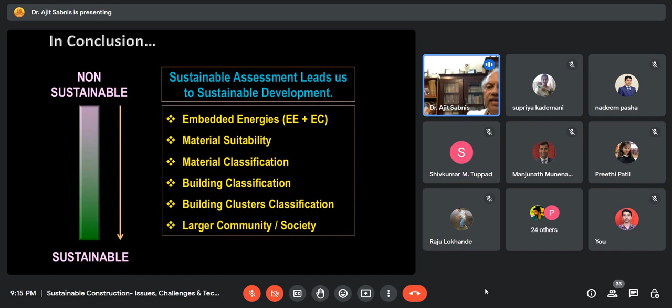So ultimately, when we ask how do we do it, once we understand the core principles of these design parameters, decarbonization is one way forward. In three simple terms: we need to optimize energy efficiency, reduce the carbon footprint which is the impact of embodied carbon, and optimize embodied energy and embodied carbon.

Then fuel switching - that means using renewable energy wherever possible. That is the fundamental basis. We've taken all these things into consideration and talked about it.

The key aspects to be addressed include flexibility and resilience - resilience in terms of soil, resilience in terms of water, flexibility in terms of air pollution, resilience in terms of earthquakes, and all these things need to be taken into consideration.

There's an emerging need for a paradigm shift, which we already talked about - from post-disaster mitigation, we need to move to pre-disaster mitigation. We need to assess the project before it goes into the execution stage.

So once we know, for example on the drawing board itself, that a building is not going to be sustainable, we have lots of options - to change the technology, change the methodology, play with the materials, and bring it to the most sustainable building or infrastructure project. This is as far as new or greenfield projects are concerned.

As far as existing projects are concerned, we need to work out how to retrofit them, and whether it's worth retrofitting or demolishing them. That is an altogether different analysis.